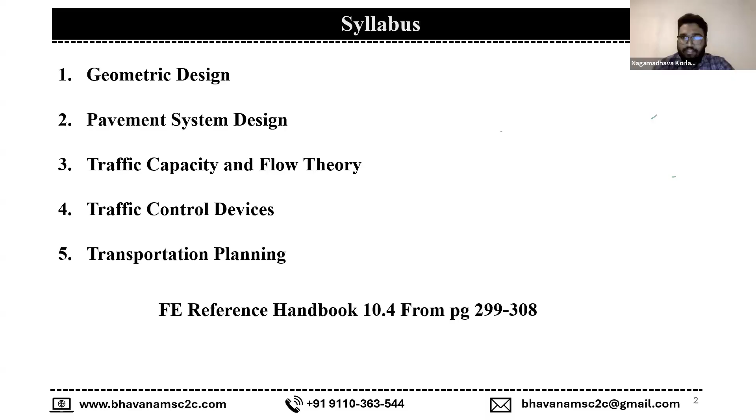And before going to the geometric design, I want to go through the handbook once, so in your examination you can find a similar kind of setup in your system. Consider this is your whole screen, and half of the screen you have this handbook, like this half you have your handbook, on a big screen. Don't worry, this is a small laptop screen, so it's a big monitor. You can see halfway clearly, easily.

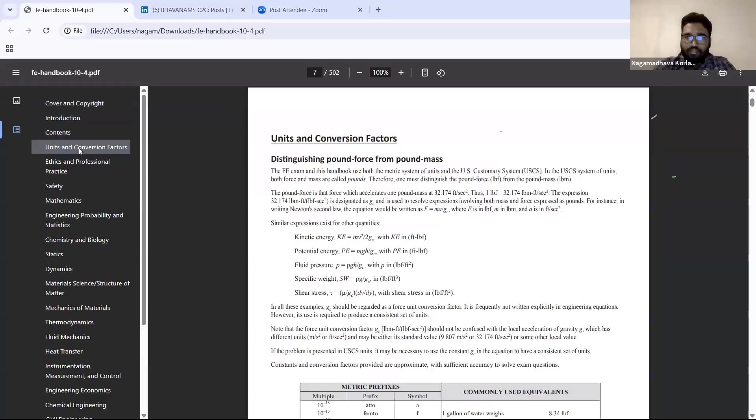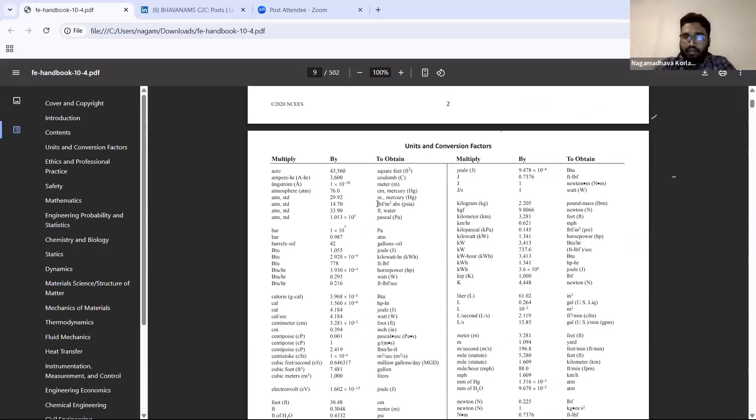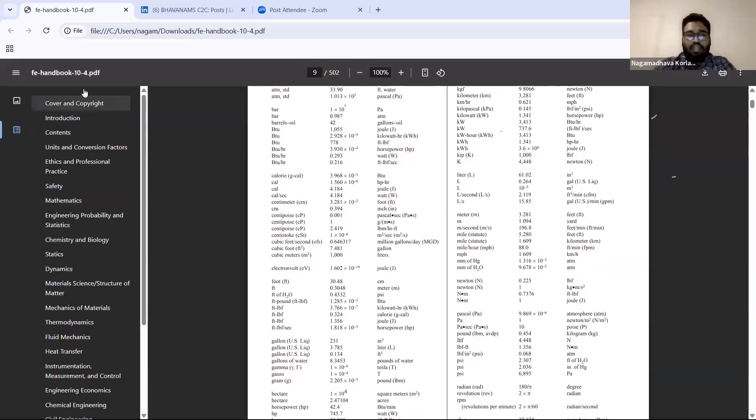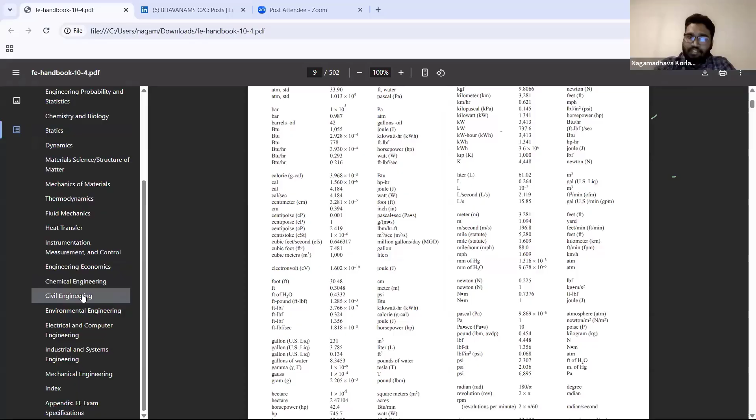And in the handbook, basically you need to see units and conversion factors. If you ever missed or don't remember how to do something, you can see here. You can feel free to go there and convert your factors, convert your units from here. And these are the subtopics, side headings in the contents of this handbook. You will find the transportation topic in the civil engineering module, from page 299 to 308.

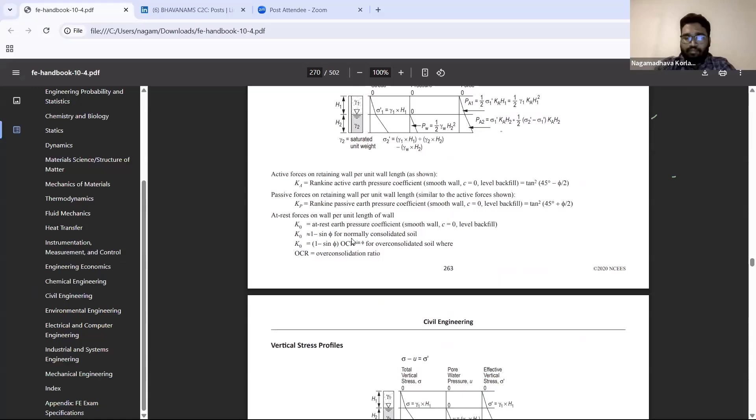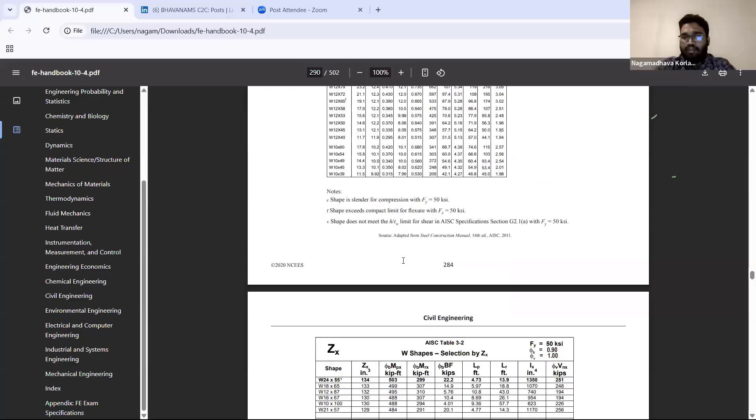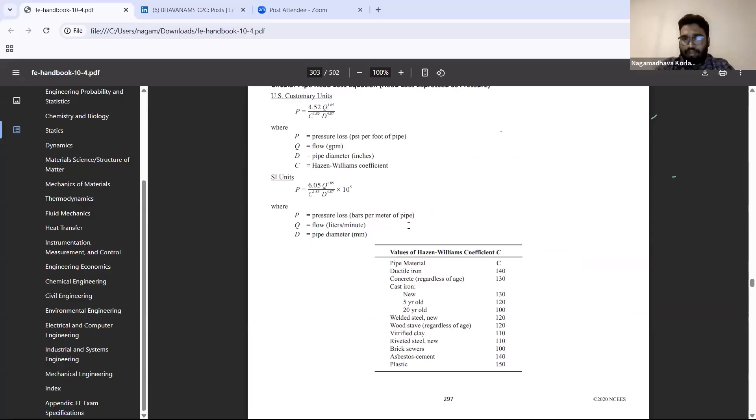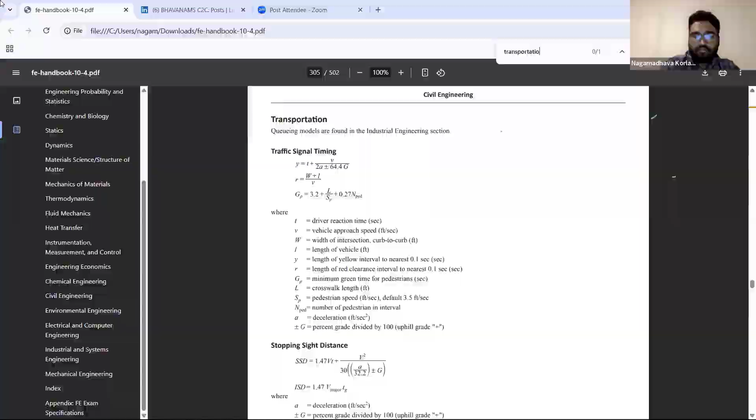This is one type, one procedure where you can see where the topics lie. You can simply go to the sections and scroll down to where the exact topic you are searching for is. Otherwise, you can simply click Control F and type transportation, and you'll find the section, and come to your section.

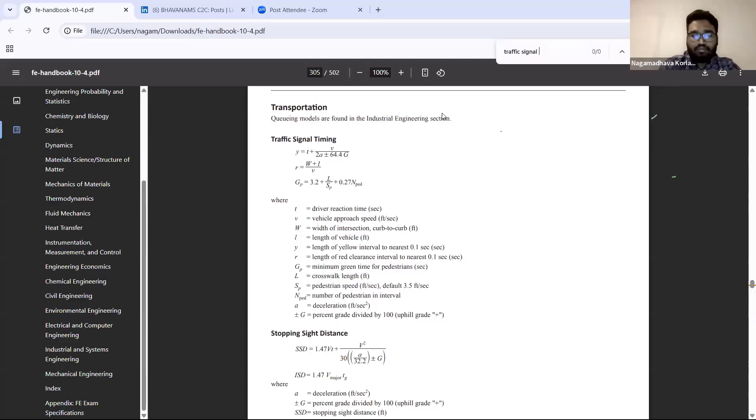Even if you don't know, sometimes if you get a question from traffic signal timing, and you don't know which topic it came from, you can simply type the exact phrase and you'll find the section, or you can find the formula from it. These are the 2 things you need to see, so you can get through that section easily. And if you find something more interesting, please let me know, or feel free to use that.

Here my intention is to find out the formula easily without any turbulence, without wasting any time.

Okay, you can see traffic mentioned in the first line itself. Queuing models are found in the industrial engineering section, so most students omit this topic. They don't know what queuing models are or where industrial engineering section is. Fortunately, once in a blue moon, you can see a question from queuing models, mostly dedicated towards industrial engineering, so we don't see questions often. But we don't want to lose that mark, so we'll see how much we require from that section.

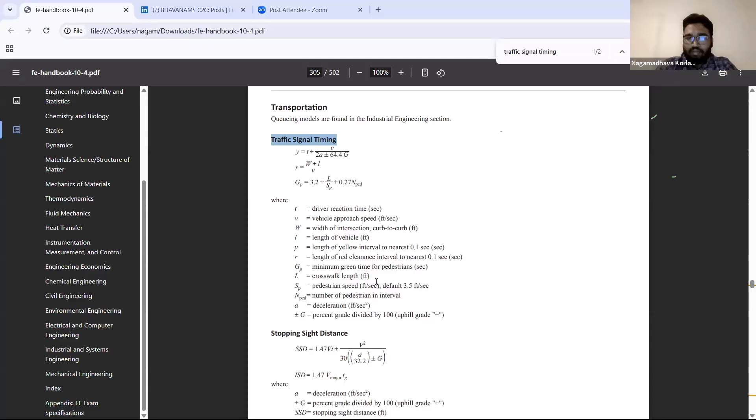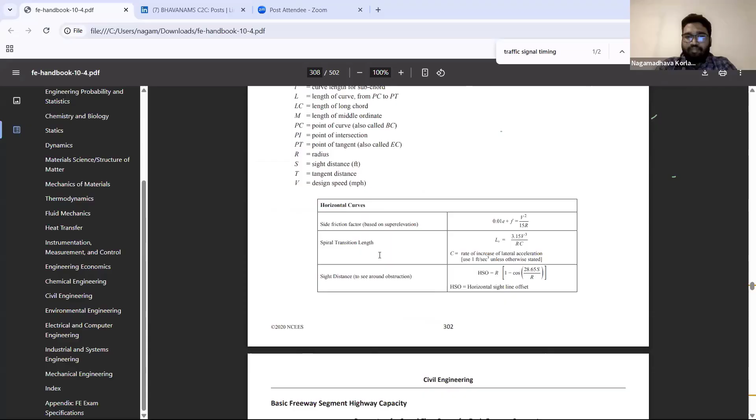In our last class, it is related to traffic planning, so we'll discuss queuing models there too. You can see traffic signal timings, yellow light, red light, green light, stopping sight distance formula, peak hour factors, vertical curves, horizontal curves with special things in horizontal curves, and basic freeway segments.

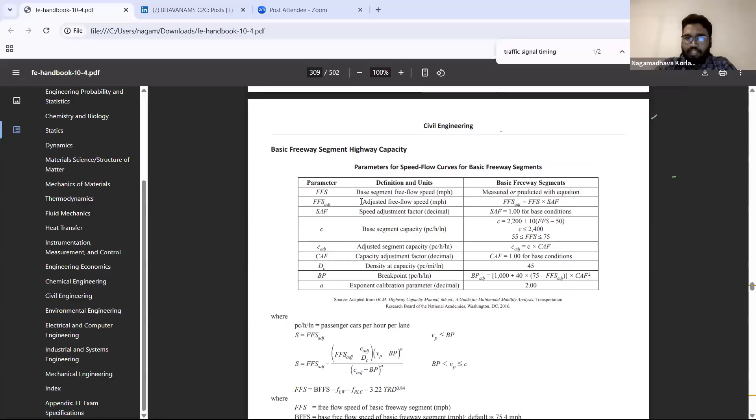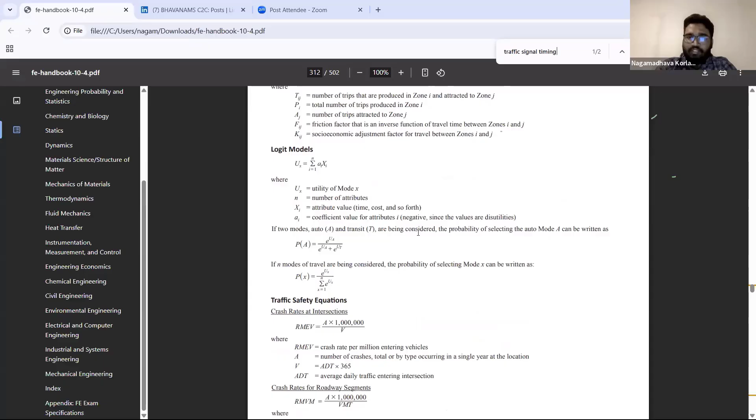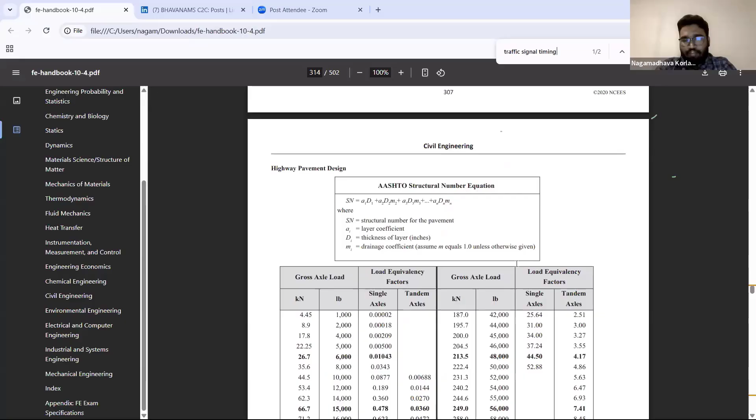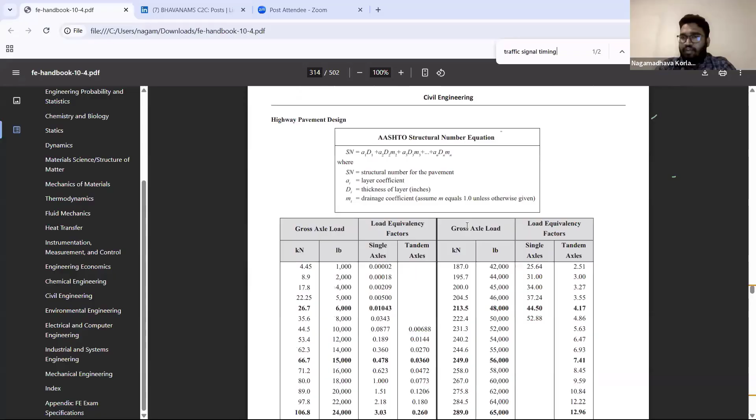In this topic you may expect a direct question. They don't play around with units in this topic particularly. And traffic flow relations, Greenshield models, gravity models, crash reduction, safety factor, traffic safety equations, and pavement design, as I told you earlier - the highway pavement design. These are the tables and formulas for the structural number. From page 299 to 308 are the page numbers for your entire transportation engineering section.

Okay, so now our first topic is geometric design. Going into what we're actually looking at today - our first topic is stopping sight distance. So let me ask you a question.

Imagine yourself driving on a highway. At some certain distance, like 200 feet or 300 feet prior to you, you're traveling at 60 miles per hour in your car. At 200 to 300 feet away, you see one truck halted, or some accident happened. So imagine you're driving on a highway like this - you are here, your car is here, your car is at 60 miles per hour. A truck has halted like this. You don't have any space to move around.

What will you do? Just imagine this scenario - you are driving a car on a nice, good highway without anyone else around. It's a pleasant day, no one is there at that time. There is no way to escape, no way to turn around and go around that vehicle. What is the first thing you'll do in this situation?

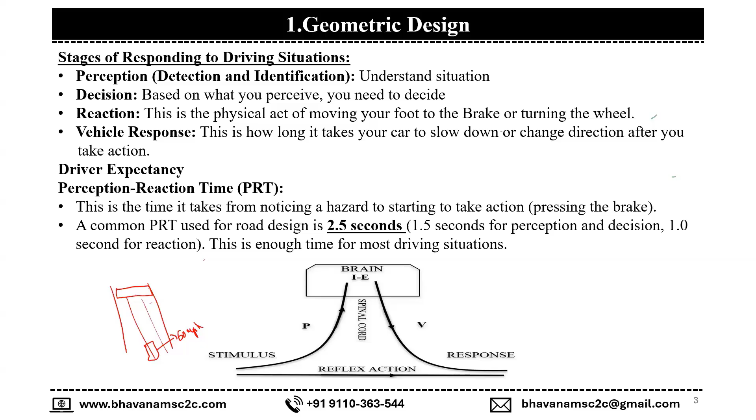I think we have lesser perception reaction timing than older ones, I think. Yeah, perfect. Why? Because older guys, they have greater reaction time.

Even before that, what we call perception and decision making time is maybe similar for both persons, in their 20s and 50s, but reaction time may be different. That guy may take 1.5 seconds in that condition.

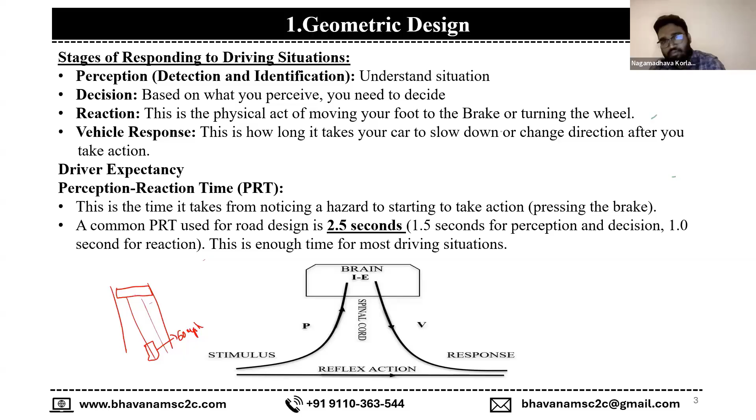So perception reaction time varies from driver to driver. You cannot just assume 2.5 seconds is ideal for everyone. It may differ, but for FE, if they give that time, it's wonderful. If they don't give the time, use 2.5 seconds.

So here's the condition: in the car, you've seen a person. At this point in time, you've seen this lady walking around and thought she's some mad person or something like that, and you thought you need to stop without hitting her. So you've seen this lady, and thought there is something bad happening and you need to stop. This decision making takes 2.5 seconds, this is your perception reaction time.

In this 2.5 seconds, you travel some distance. In that 2.5 seconds, you'll travel some distance. That distance is the reaction distance.

And then, coming to here, you reacted and applied the brake here. After braking, the car will slowly decelerate and stop here before hitting her. So this is braking distance. After you applied your brakes, you also travel some distance. That distance is called braking distance.

So this whole thing from the start, seeing one obstacle or something you need to stop for, from that object to the point where you stop, is called stopping sight distance or stopping distance. In general terms, we call it stopping sight distance. This is why we need to provide such a distance, to eliminate accidents. That's why we place some stopping sight distance on our highways.

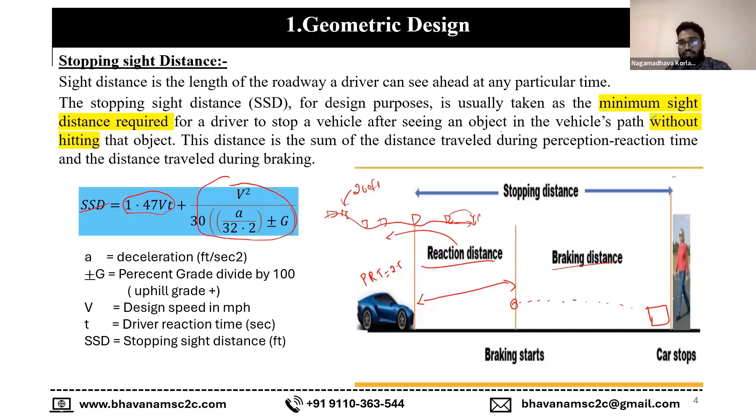1.47vt is your reaction distance, and v squared divided by 30 times (a divided by 32.2 plus or minus G) is your braking distance. Let me ask another question here.

v is design speed in miles per hour, and t is driver reaction time in seconds. So here's my question: do I need to change my design speed from miles per hour into feet per second squared or feet per second? Do I need to change that? If yes, why? If no, why? Volunteer yourself, make a guess.

There's no problem if you get something wrong, you're going to learn. Yes, who said yes? This is Akhilesh. Akhilesh, okay, we need to change those units, Akhilesh.

Let me make another thing clear here. This formula I took from the handbook. Even if you see in your handbook, this is the exact imprint. You can see it there too. So the handbook says speed, design speed, is in miles per hour. And SSD is in distance - ultimately SSD comes out in feet.

So if we have miles per hour and then seconds, I don't know if that cancels out on its own. So if we need that in feet - so your stand is that we need to change that miles per hour into feet per second, right? Akhilesh, you're saying we need to change design speed from miles per hour to feet per second, right? There's nothing to worry about, even if you're wrong, it's fine. Don't worry. Does anyone else have another call?

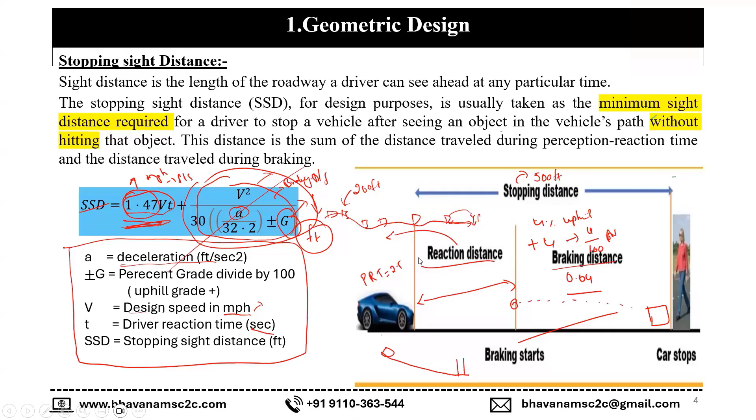All right, thank you. You mean feet, so right? I believe... no, yeah, Akhil? You mean feet? Yeah, to feet.

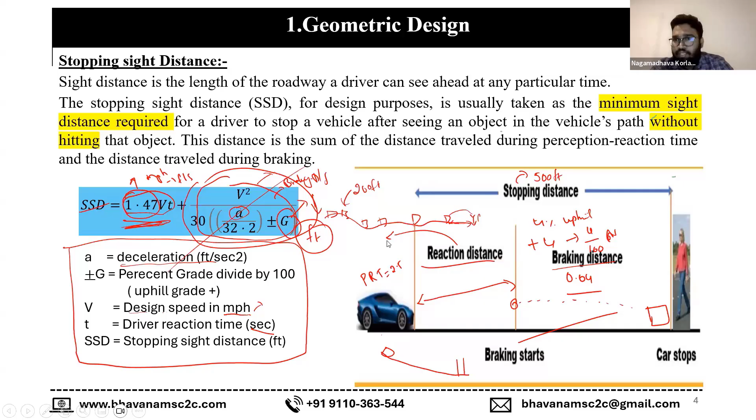I believe no one has any further questions, so I'm moving to the next topic. If you have any, please feel free to ask me right now. Okay, we have another 10 more minutes.

So this is intermediate sight distance or intersection sight distance. Most of the time you will see it called intersection sight distance, but I got this intermediate sight distance name too, because sometimes you may see this as well, so I don't want to omit anything. So intermediate sight distance or intersection sight distance, ISD - make sure you know this one.

You keep in mind this intersection or intermediate sight distance concept. The concept behind this is, if you're traveling on a major road and there are some connecting roads too, if you're traveling in this stream on a main road, you have higher speed than this guy.

If you're traveling and at some distance, let's say 15 meters, you'll find a hazard, or another car wanting to join this stream at a lesser distance. Even if you are 15 meters away from this intersection, if the sight radius is just 6 meters, only when he is 6 meters away from that intersection will you be able to see this guy. Why?

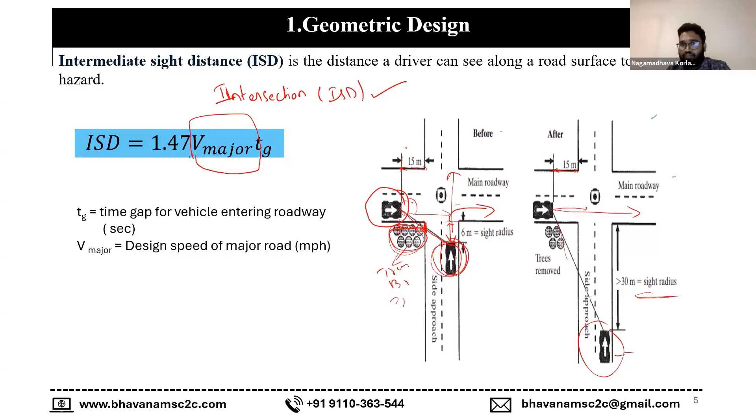In this condition, we only consider V major. V major means you only think about this guy, because at the intersection he'll definitely have lesser speed compared to this guy. So the major problem for the vehicle to stop is this guy. So we take V major, the design speed of the major side of the road, and TG is the time gap of vehicles entering into the roadway.

So this time gap between these two should be higher, at least 3 or 4 seconds. In some books they give 3 seconds minimum, and in some books they give 4 seconds minimum. But for the FE exam, they'll definitely give you the TG time.

If you get any question on intermediate sight distance or intersection sight distance, it's a freebie for you. They are expecting you to get 1 mark just by giving you the mark. So if you're lucky enough, you will get this question.

Intermediate sight distance is 1.47 times V major times TG. Make sure you calculate with the major side, the main road vehicle speed, not the intersection speed. And TG, they'll definitely give you 100% sure. If they miss it, they'll give you the ISD, the intermediate or intersection sight distance value instead. By giving any two variables in this formula, you can easily find the other one using one formula.

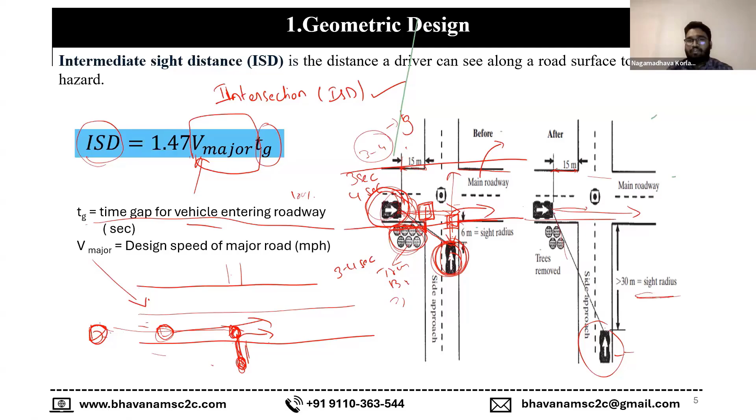1.47 is the constant which converts miles per hour into feet per second, just a conversion factor. If you convert, 1 mile equals 5280 feet, and 1 hour equals 60 into 60 seconds. By cancelling out the units, you get 1.47 something. 5280 divided by 3600 is 1.4667, so for our convenience it is 1.47. So this is the conversion factor.

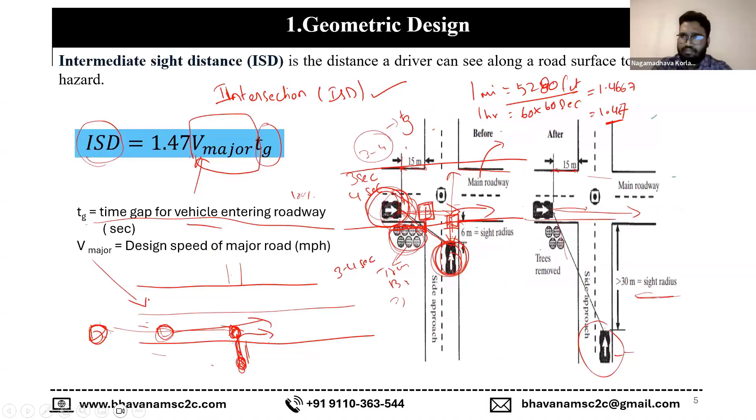So today we are going to see, coming back to horizontal curves, I believe no one has a question or doubt in intersection sight distance now. If you have any question or ambiguity in this topic, don't worry, because V major and these three terms: 1.47 is your conversion factor, that is constant, you don't need to worry.

V major is your design speed of the major road, definitely you'll see that in your question. If there are two speeds given in your question, the higher speed is your V major. TG is the time gap interval between vehicles entering into the intersection, this time will definitely be given in the question. So there's no way you'll go wrong in this question unless you make a calculation mistake. Make sure you practice well with your calculator without making mistakes.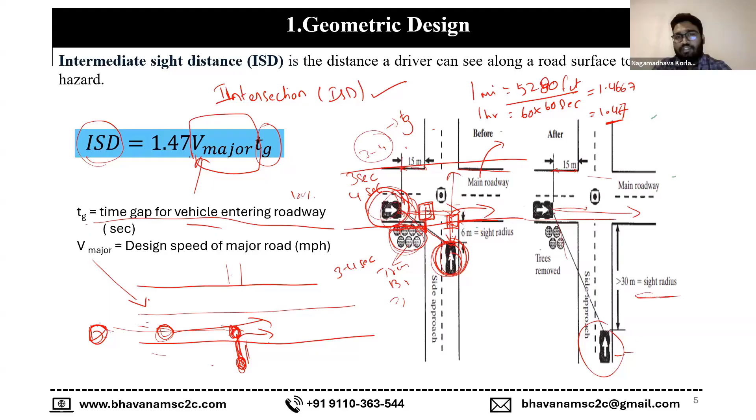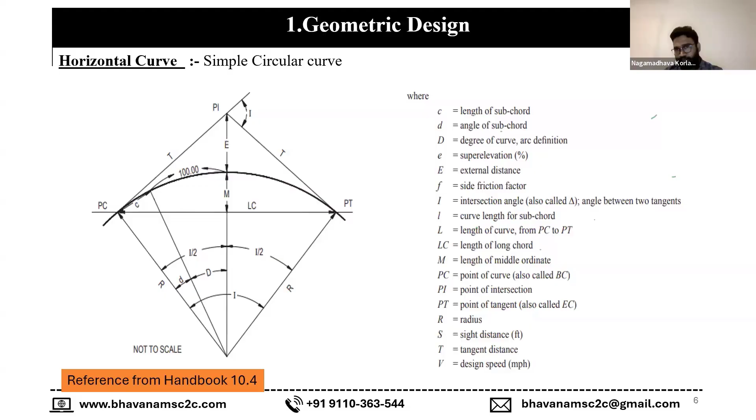Coming to the horizontal or simple circular curve, we all know what a horizontal curve is. A horizontal curve looks like this. When traveling on a road, you'll find many horizontal curves. This is the actual scenario you'll see on a road. Right now we are seeing it from the top view, not from the front view or cross-sectional view. We are seeing this road from the top angle.

So consider there is a straight road here and a straight road here. You want to travel from here to here. If I laid a road like this, it's impossible for you to turn a 90-degree bend at a certain speed. You're definitely going to end up with an accident.

So what engineers did, they studied and made this. This is a straight road. From here to here, we maintain some tangent which gradually turns the vehicle. Here also the same. They made a curve, a circular curve with some radius, and from here, this end point, they again made one tangent, and again this merges into the straight road.

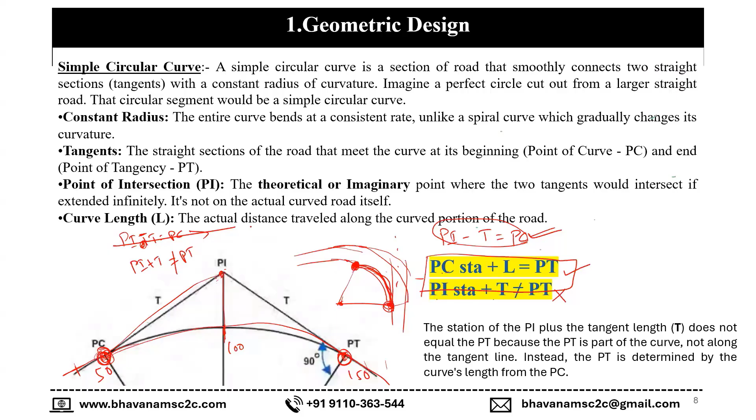What about PI minus T? Let's go to the second equation. This is the PI point, meaning the imaginary point of intersection of tangents, drawn with the same slope. From this point we have a certain distance.

Let's say in this road you can understand it better. I have a PI point here, this starting point is 0, traveling like this and ending here—this is the PT point. So: PT, PC, and PI.

This is the tangent. I got this point as 100 feet, and this tangent is, let's say, 30 feet. For getting this PC value: 100 minus 30, so PI minus T equals PC.

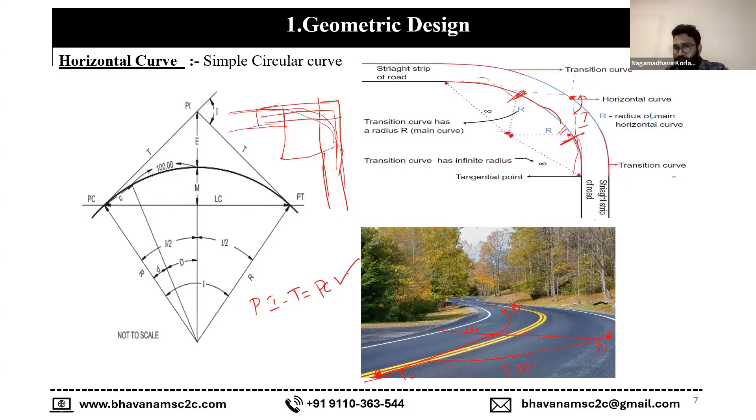But you know there is a tangent here, and this tangent is 30 feet. So can I write PI plus 30 equals PT? Sorry, PI plus T equals PT? No, this is wrong. Why?

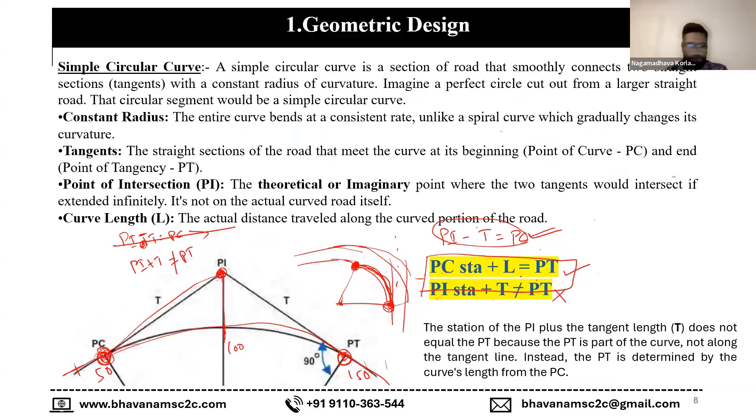Because we know the starting point, we don't know the ending point—that's why we get the curve here. So PI minus T equals PC. That's fine, but PI plus T is not equal to PT. PC plus length of the curve equals PT. So these are all the equations we're going to have in our handbook.

Radius and degree of curve, radius with respect to long chord, tangent with respect to long chord, tangent with respect to radius of the curve, tangent with respect to degree of curve, length of the curve with respect to radius and intersection angle or degree of curve, and middle ordinate length with respect to radius. These are all the equations—you'll have this in your handbook.

One thing you need to understand is which is the better option and which is the better formula to use in a given time. You need to figure that out.

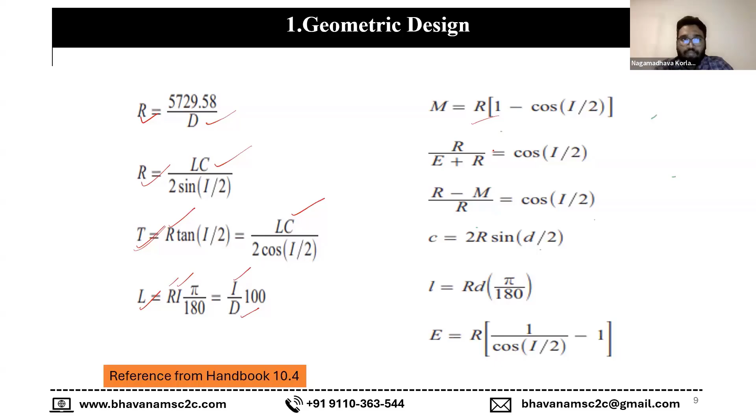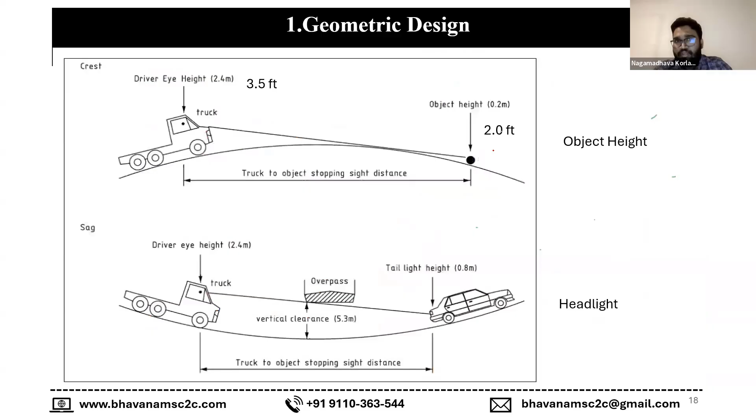We'll see some questions tomorrow at the first instance, in the first 15 to 20 minutes. We'll discuss what degree of curvature is tomorrow, along with super elevation, horizontal sightline offset, spiral transition curve, and some vertical curves too. I believe tomorrow we'll finish horizontal curve problems and the theory of vertical curves, completing the theory of geometric design.

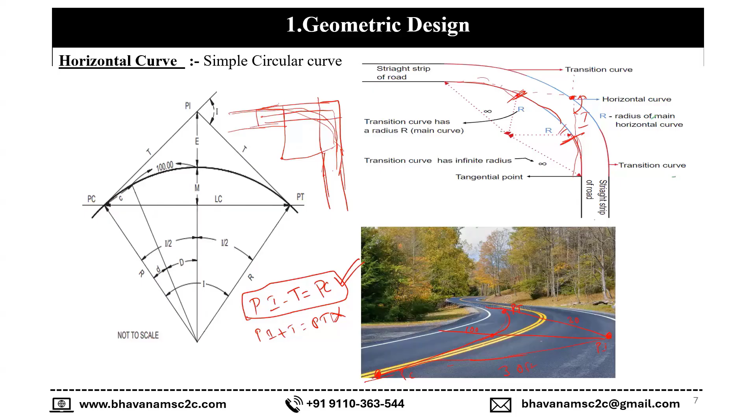All right, no problem, thank you. Yeah, thank you, Samir, have a good one. Yeah, good night, see you tomorrow.